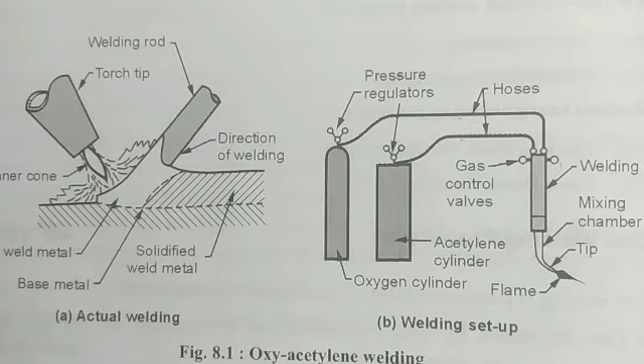Students, in today's lecture, we will be learning about oxyacetylene gas welding process.

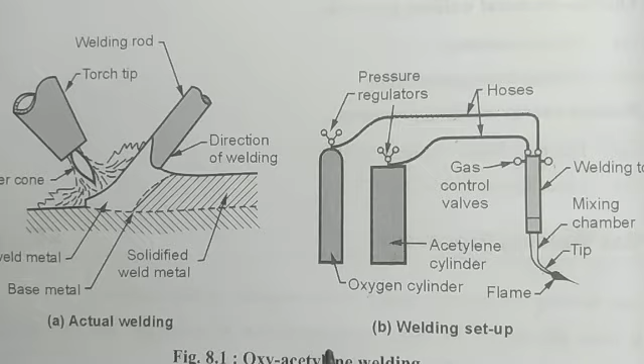Oxyacetylene gas welding process is a fusion type of welding process in which heat, which is utilized for welding the workpieces, is obtained by the chemical combustion of oxygen and acetylene. This is a fusion type of welding process in which generally a filler metal is used.

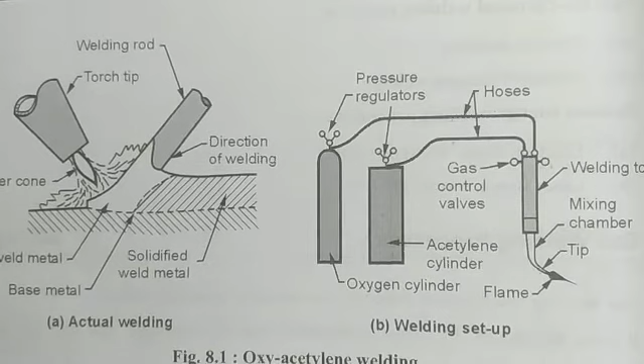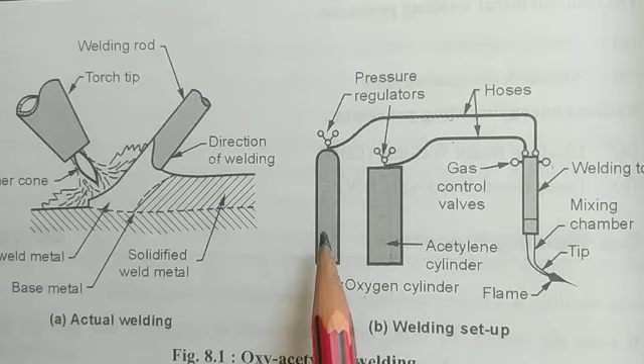Now let us see what is the setup for this oxyacetylene gas welding. In this there is an oxygen cylinder. This oxygen cylinder is painted black and it has a pressure regulator on its top, and this pressure regulator is having right-handed threads.

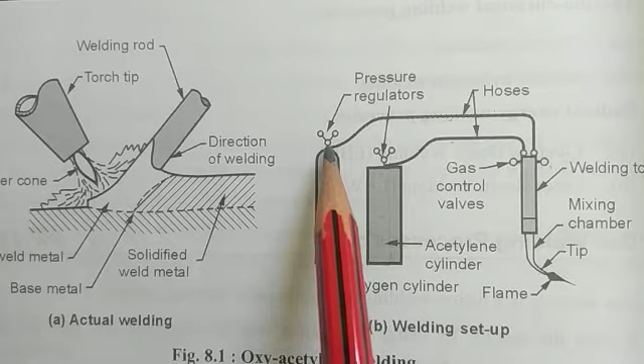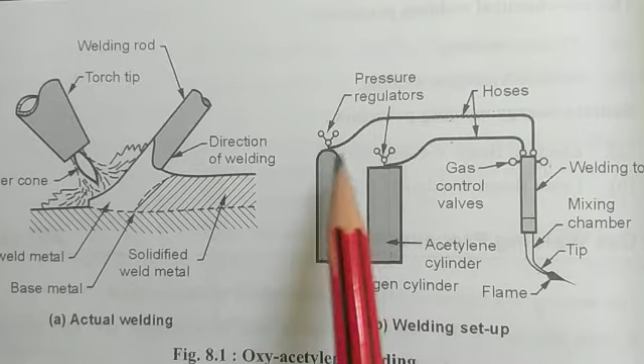To regulate the flow of oxygen there is a pressure regulator, and here there are two pressure gauges. One of the pressure gauges measures the pressure inside the oxygen cylinder, and the other pressure gauge measures the pressure which is supplied in the hoses or in the oxygen hose.

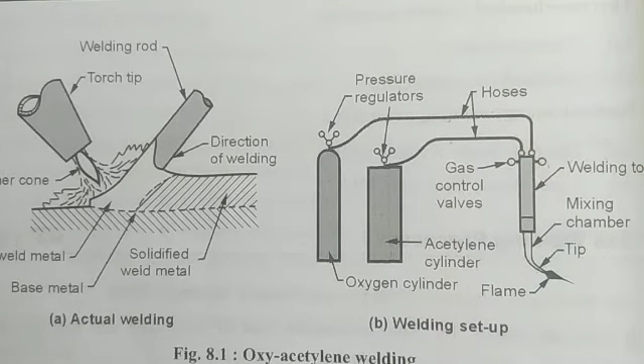In this oxygen cylinder, oxygen is stored at a pressure of around 200 to 225 bar.

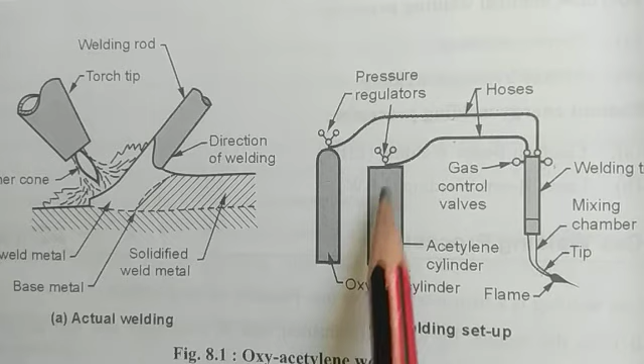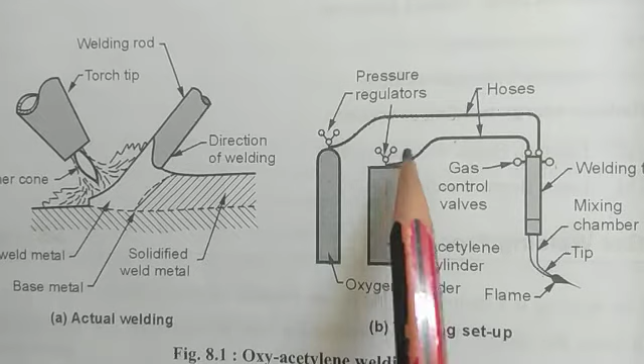There is another cylinder which stores pressurized acetylene. This cylinder is comparatively larger in diameter in comparison to the oxygen cylinder, and its height is small in comparison to the oxygen cylinder. This cylinder also has on top of it a pressure regulator and pressure gauges. The pressure gauges measure the pressure inside the acetylene cylinder and the pressure in the hose for acetylene supply.

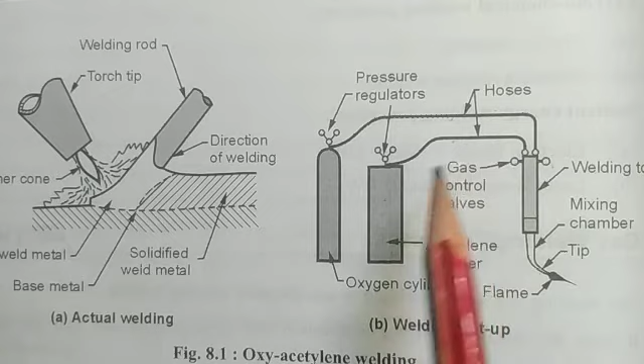Now the acetylene in this cylinder is stored at a pressure of around 15 to 15.5 bar.

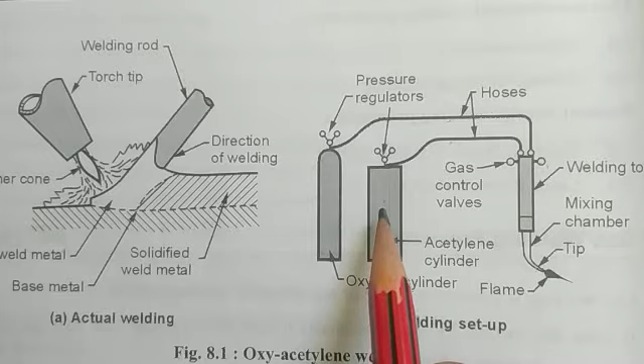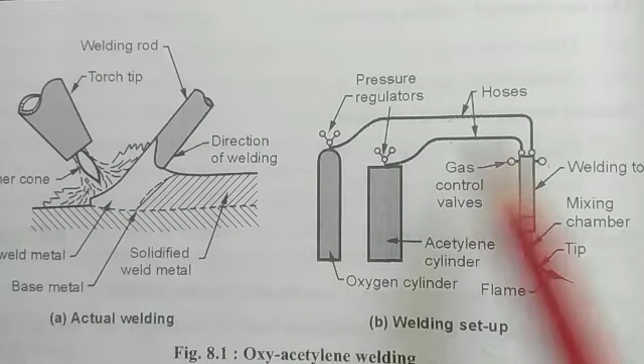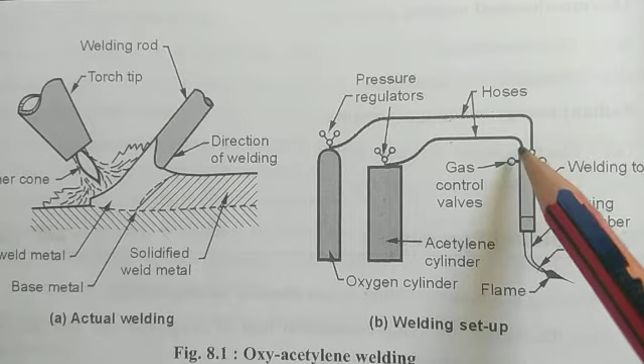Now these cylinders are further connected to the welding torch with the help of hoses, and these hoses are used to carry oxygen and acetylene to the welding torch. The hose which is carrying oxygen to the welding torch is blue in color, and the hose which is carrying acetylene to the welding torch is red in color.

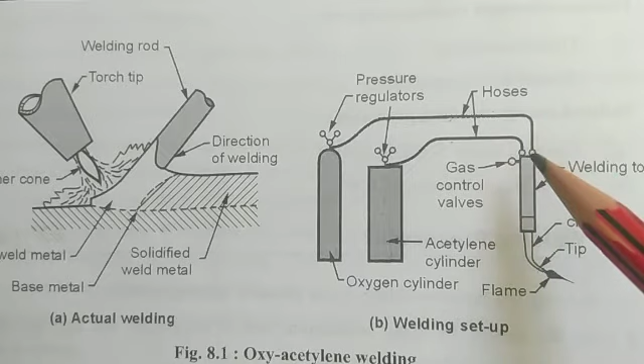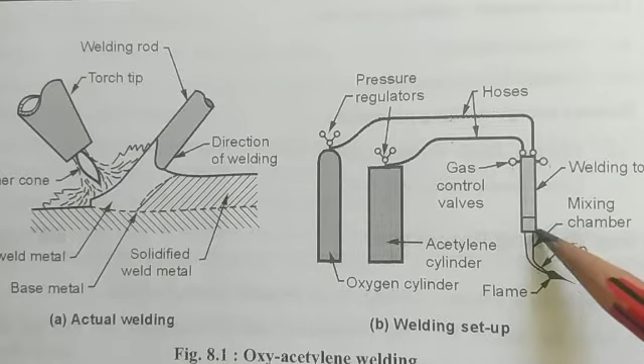The welding torch receives the supply of oxygen and acetylene at a reduced pressure by regulating these gas control valves, one for acetylene and another for oxygen. Now here in this welding torch there is a mixing chamber in which acetylene and oxygen will be mixed, and in the welding torch there is a nozzle, and at the tip of the nozzle the flame of oxyacetylene is made.

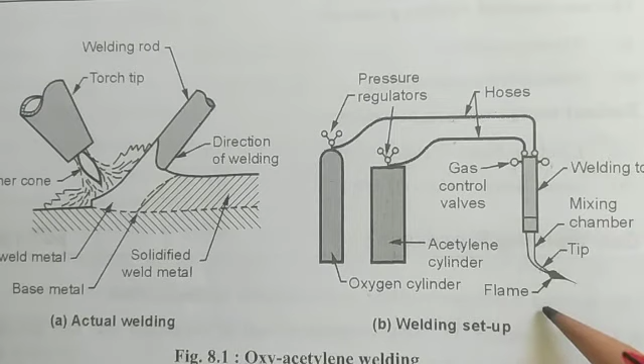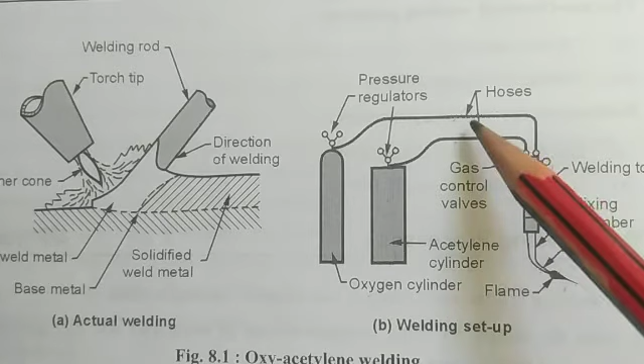Now let us see how this setup works, how flame is generated in oxyacetylene welding setup. Now first, by opening the regulating valve of oxygen and acetylene, the required pressure is supplied of oxygen and acetylene to the welding torch.

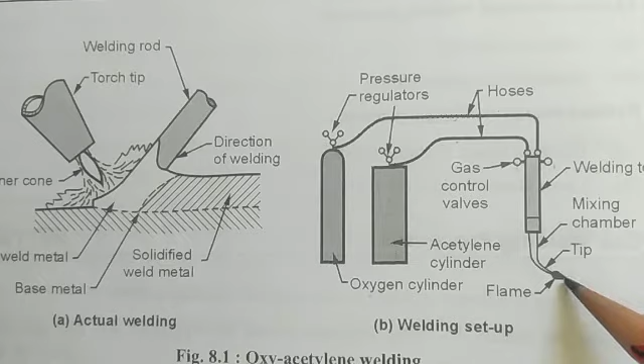Then first we open the acetylene gas control valve and purely acetylene comes out of the tip of the nozzle of the welding torch. Now this pure acetylene is ignited by a friction spark lighter.

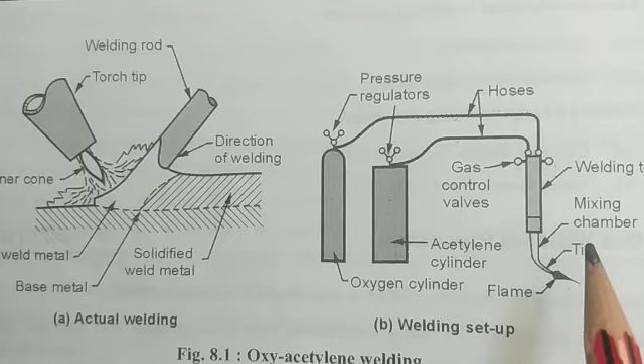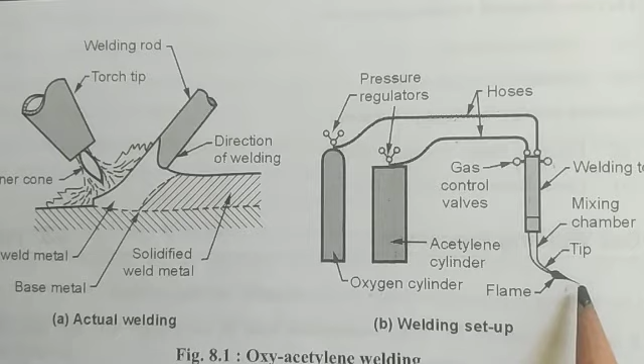Once this pure acetylene flame is ignited, we now open the oxygen control valve gradually so as to increase the supply of oxygen through the nozzle. And as the supply of oxygen is gradually increased, a time comes when the flame generated has a very defined and distinct inner cone, which is light blue in color, and it is surrounded by an outer envelope.

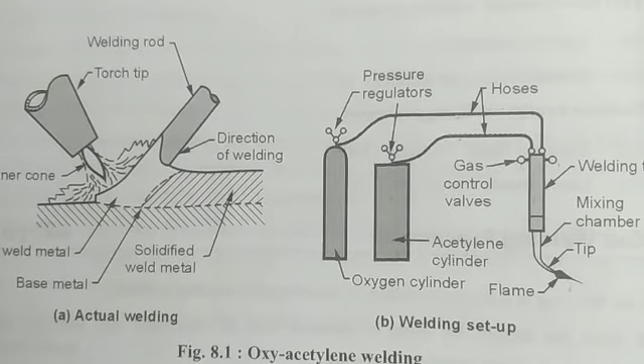Now let us see the reactions which will be carried out in this process between oxygen and acetylene. Here you can see there will be two reactions.

One is the primary reaction. This primary reaction takes place because of the supply of acetylene and oxygen in equal proportion in the mixing chamber of the welding torch, and when this chemical reaction takes place, it produces carbon monoxide and hydrogen by releasing heat.

Now this chemical reaction takes place in the flame's inner cone, and the heat contained in the inner cone is utilized for welding.

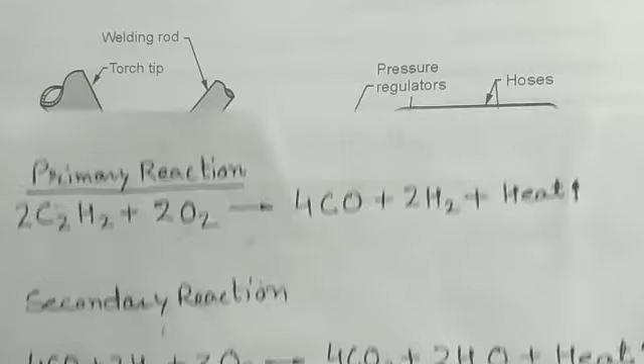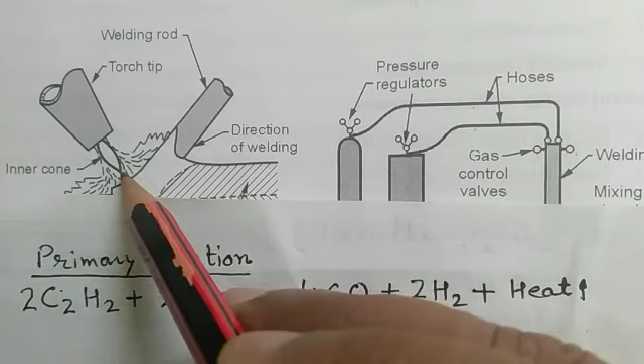Here you can see this is the inner cone. The outer cone is deflected. This inner cone tip is kept at a distance of 2 to 3 millimeters from the work surface, and the heat of this primary reaction, which is contained in this inner cone, is utilized for welding purpose.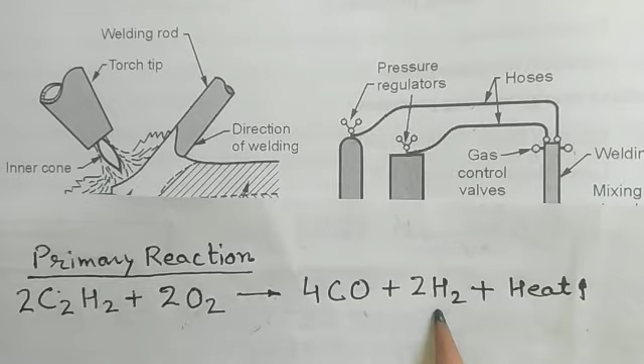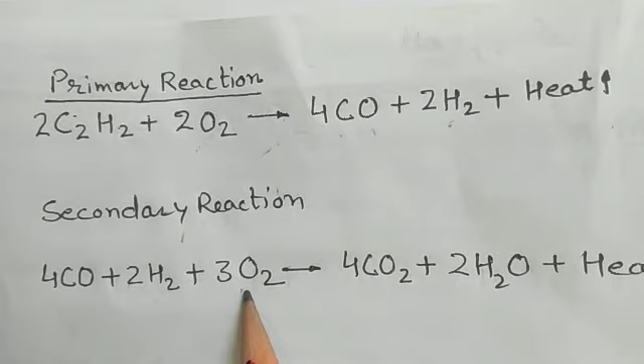But we can see here the complete combustion of carbon has not taken place and hydrogen is fully available for further combustion. Now the secondary reaction takes place, and this secondary reaction utilizes the oxygen supplied from the atmosphere around. These products of combustion are further combined with the oxygen supplied from the atmosphere in order to complete the combustion by making CO2 and water vapor and further releasing heat.

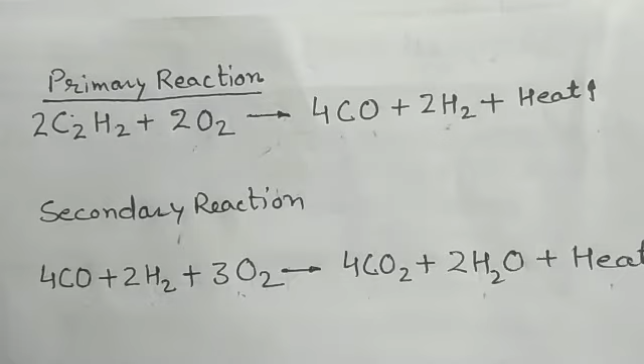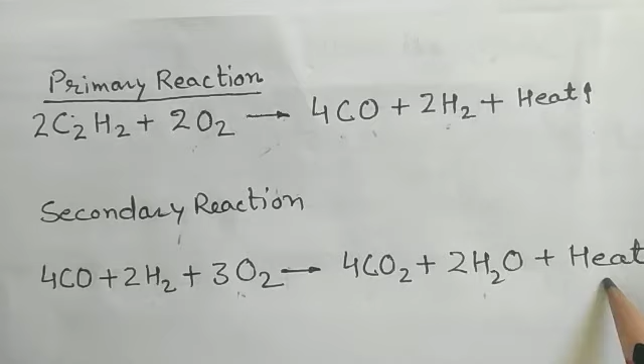This heat is contained in the outer envelope of the flame which is produced in the welding torch nozzle tip. This heat in the outer envelope of the flame produced in oxyacetylene welding is utilized to preheat the workpiece. Here we can see this outer flame is deflected all around the workpiece so that it preheats the workpiece.

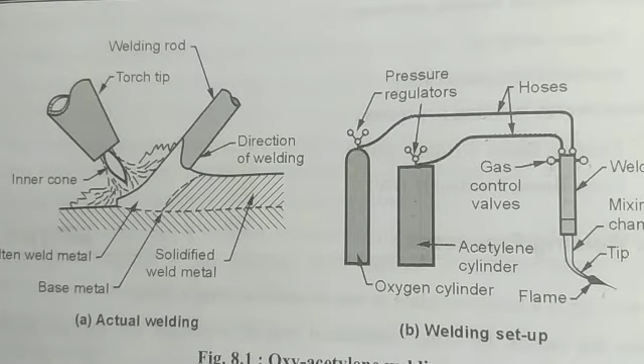In this oxyacetylene welding process, the maximum temperature of around 3500 degrees centigrade is achieved when oxidizing flame is generated. But generally we use neutral flame for welding most materials, that is mild steel, aluminum, copper, cast iron and stainless steel, and the temperature achieved at the neutral flame is around 3250 degrees centigrade, and this flame is known as neutral since in this flame the equal proportion of oxygen and acetylene is supplied from the mixing chamber.

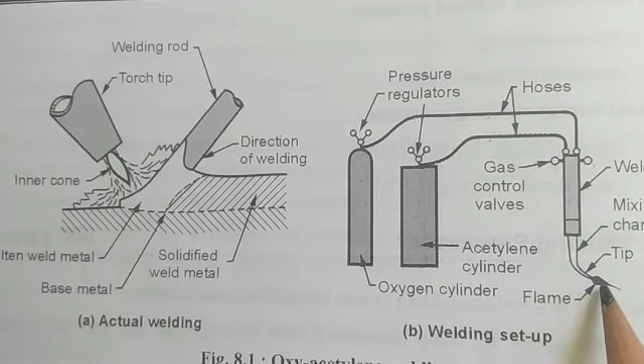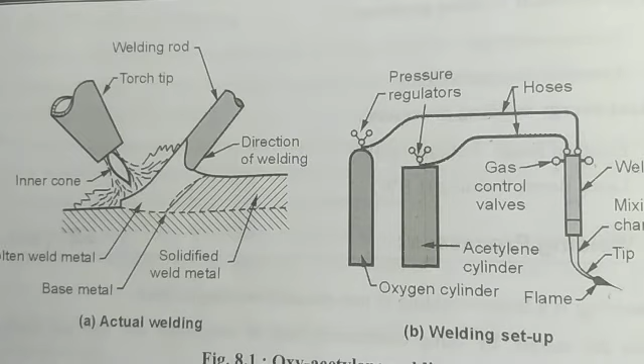There is no excess of oxygen or lack of oxygen, so that it can neither oxidize the workpiece nor reduce the workpiece, and therefore this flame is known as neutral flame, having a temperature of 3250 degrees centigrade. The third type of flame produced in this process is the reducing or carburizing flame.

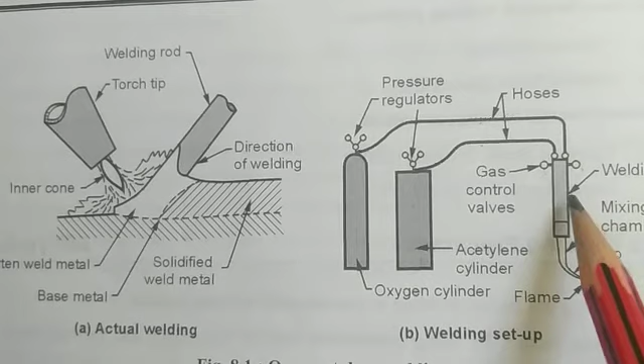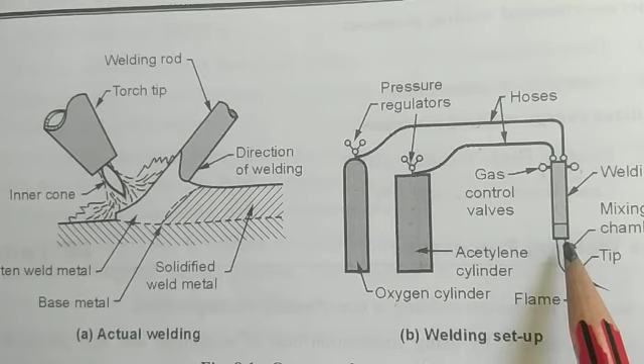In this type of flame, the quantity of oxygen is reduced in the mixing chamber in comparison to the acetylene, and therefore it has free carbon, and this free carbon is utilized for carburizing processes, to carry out heat treatment or increase the surface hardness of low carbon steel metals.

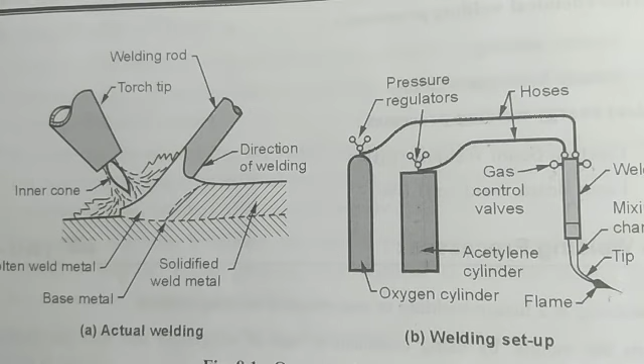In the oxidizing flame, the inner cone is comparatively smallest in comparison to all three flames because of the complete combustion of the acetylene, and therefore it produces the highest temperature, that is 3500 degrees centigrade in this process.

So this was all about the working of the oxyacetylene welding process. This welding process is generally used for repair work of comparatively thinner workpieces. Thank you.